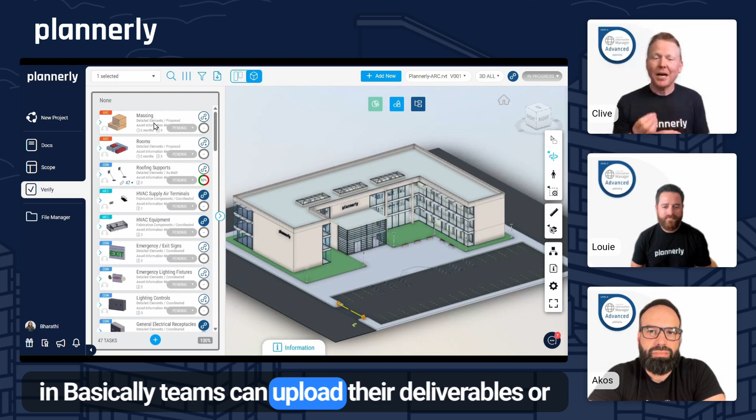This is where integrated tools like Plannerly come in. Basically, teams can upload their deliverables or connect them through another CDE. And whether they're drawings or documents, they can be connected directly to the contracted tasks.

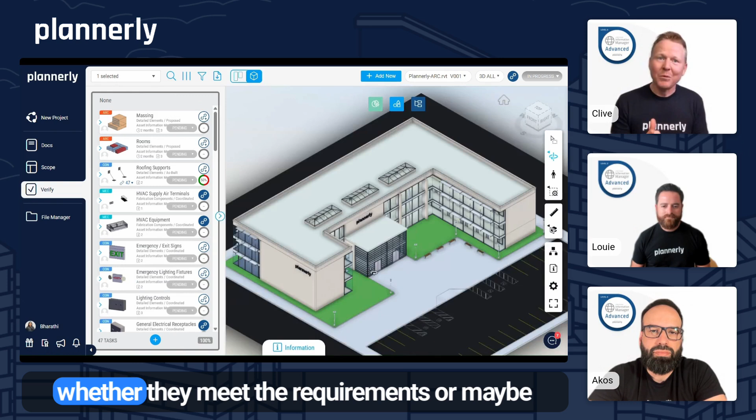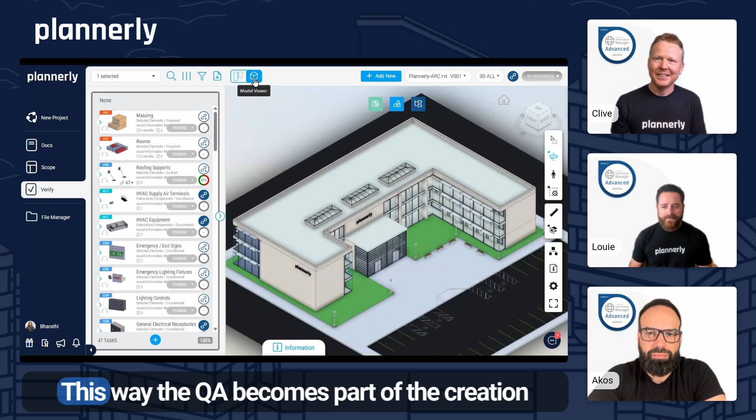And also, automatically, with the verification checks run, they can see live and visually on the models whether they meet the requirements or maybe they don't. This is a really clear way to be able to visualize what has been modeled and met their information requirements, and what still needs to be updated prior to an issue report or a topic in a BCF file being created. This way, the QA becomes part of the creation process.

So not just an after-the-fact wasteful audit and rework cycle. What would it change if the people creating deliverables were also empowered to verify and get them to a state where they simply are 100% accurate to the information requirements that have been set? Wouldn't that make the management of this workflow a lot easier?

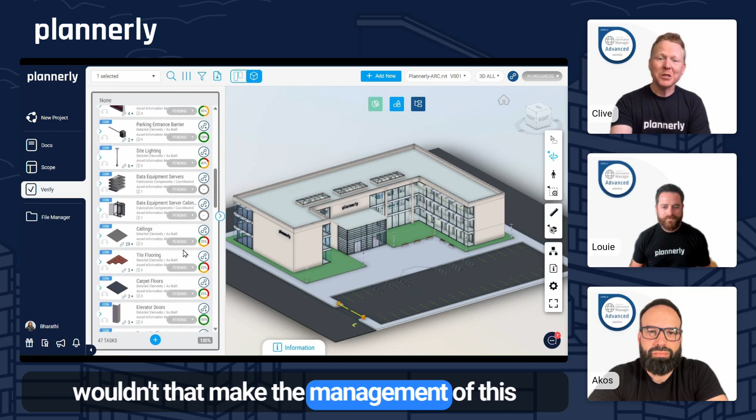If all you had to do was going through and checking the boxes to say, yep, you've done exactly what's been required because it's all shown as green. That would be a better place to be. Yeah, it's a self-QA workflow as well. So verification starts by defining simple, structured rules based on your scope.

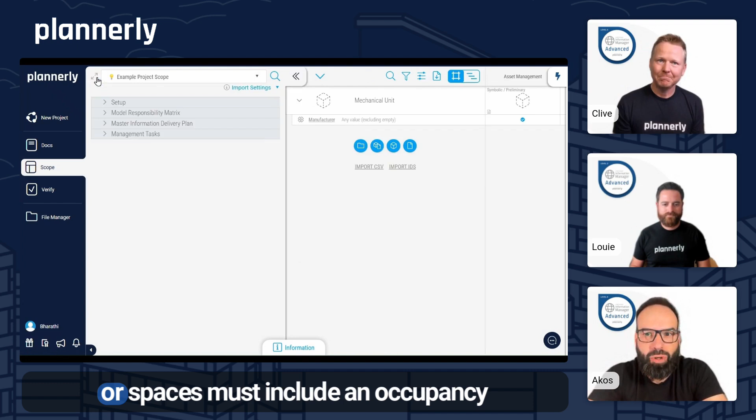So, for example, every wall must have fire rating, or every mechanical unit must have manufacturer property, or spaces must include an occupancy classification. And because these rules are tied directly to the original information requirements, there's no guesswork. Teams know exactly what conditions of satisfaction they need to meet.

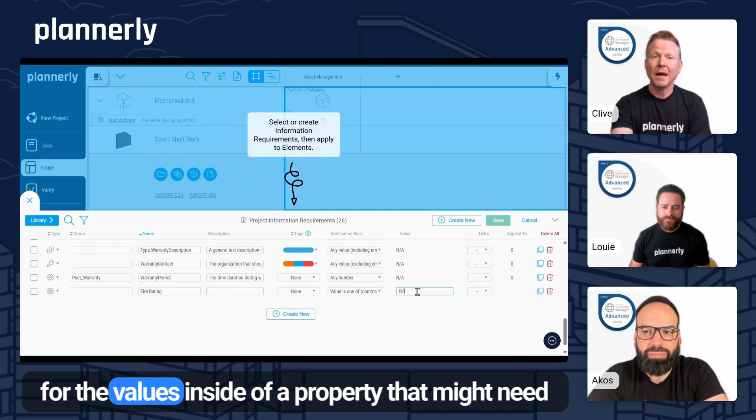Yep. So we can define the properties and the rules and exactly what those requirements are, even using some AI to define a pattern that is required for the values inside of a property that might need to be inside of a group or a property set. Once these have been defined, we can then select them and apply them to the line items in our scope grid. When teams run their own verification, they get immediate visual feedback.

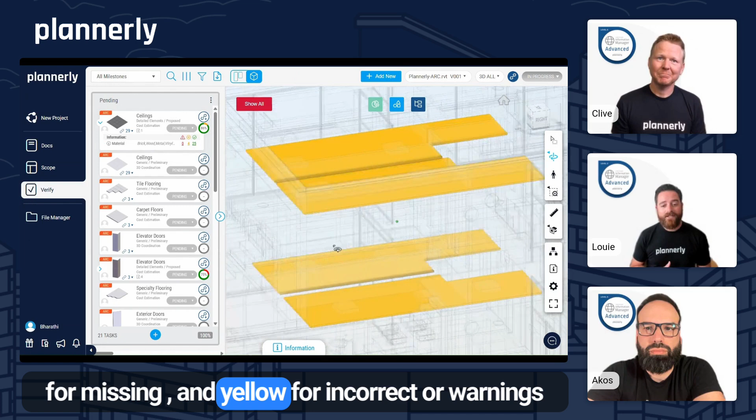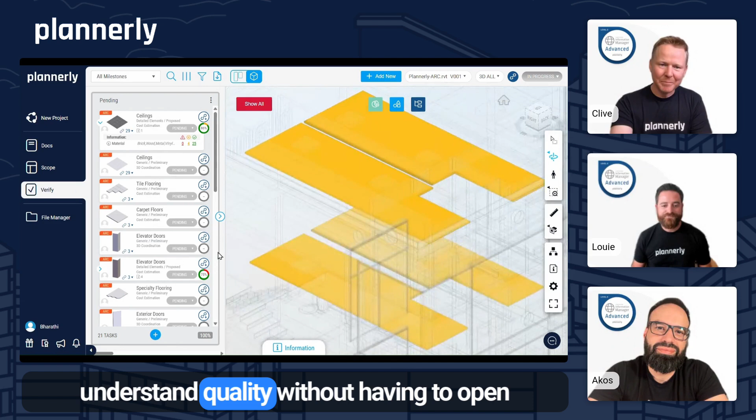Green for passed, red for missing, and yellow for incorrect or warnings. Teams can click on any issue, walls, doors, spaces, and so on, and fix problems proactively before formal submission. No more passing deliverables to a checker and hoping. Teams can own their own quality from the start. Yep, absolutely. All tied in directly to the information requirements that are part of the contract. So you can navigate through models and understand quality without having to open spreadsheets and do any manual checking.

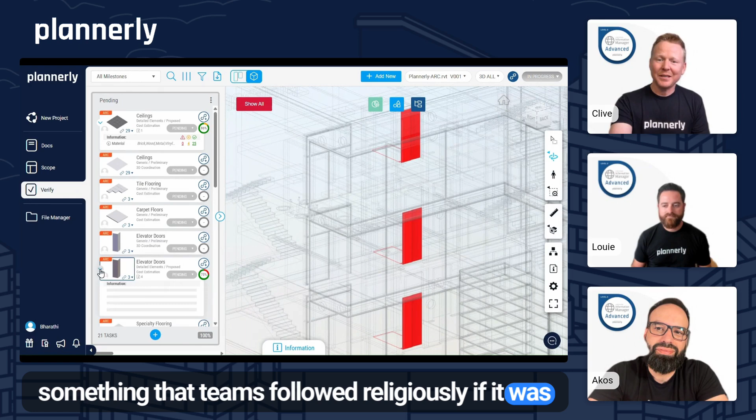How much rework would be eliminated, guys, if this was something that teams followed religiously, if it was caught and fixed by the team delivering the model rather than waiting for somebody to report it in an issue, topic, a BCF file? How much time do you think that would save?

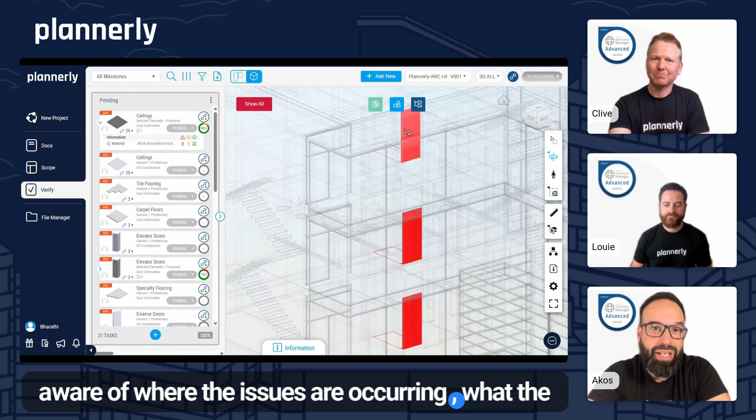The proactive nature is pretty beautiful, I believe. So not having to wait till an issue is caught by the receiving party, but you see that as you are creating the models. Of course, you are very well aware of where the issues are occurring, what the issues are. So fixing them takes no time instead of creating those long reports and sending it back to the source. So I believe it's a no-brainer that it cuts out a lot of wasteful man hours from the entire process.

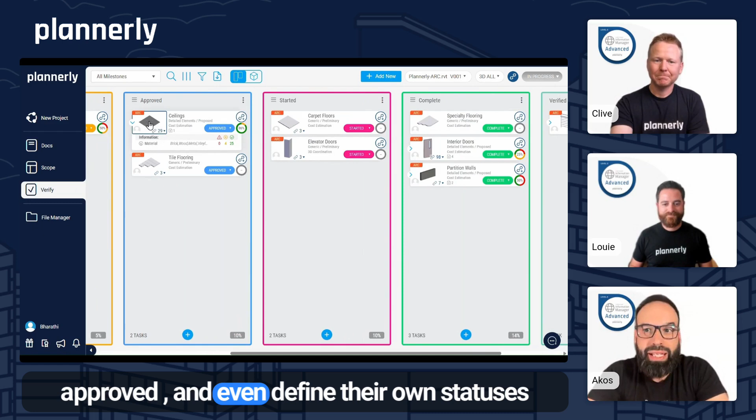Verification isn't just about pass or fail. It's about guiding progress. Teams can update the status of deliverables live in the Kanban board. Proposed, pending, verified, approved, and even define their own statuses. Yep. Real-time quality assurance tracking gives leadership the immediate visibility into what deliverable is ready, which needs maybe some work, and which ones are progressing smoothly and don't need any looking at all.

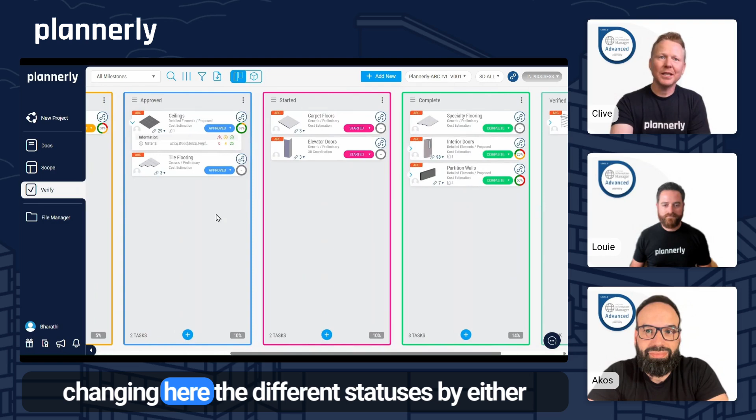Inside of a Kanban board, you can see how we are changing here the different statuses by either clicking on the drop-down or reviewing it, identifying what's done, and then just dragging the cards between the different columns to reflect the updates. It's really pretty simple and fully integrated.

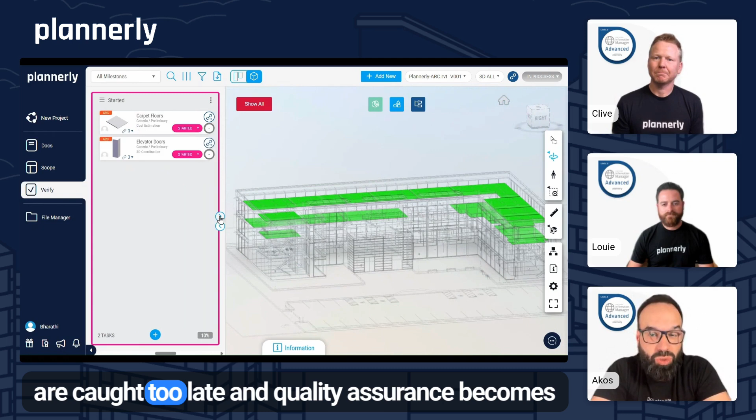Why does this matter, Akos? Why is this important? Well, without structured verification processes, compliance is very much inconsistent. Mistakes are caught too late, and quality assurance becomes reactive and very costly.

Yep. So on the flip side, with structured, integrated, and proactive, we say proactive a lot because it's all about how can you use what's been planned in order to make sure that you don't end up with lots of issues later on. So models will be aligned with the scope and the contractual requirements really early in that workflow. Problems will be caught and fixed before they become blockers and before they're even shared with anyone else. They're fixed internally. And then teams can take ownership of their own quality and build confidence across the project so that other people will actually start using the models that are being delivered.

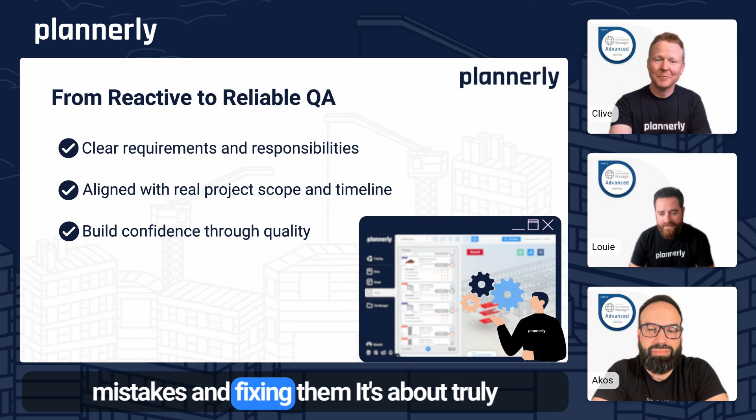Yeah, quality assurance isn't just about finding mistakes and fixing them. It's about truly empowering teams to deliver right the first time.

All right. So ready to wrap up? Let's move on to part 6, which is about exporting reports and managing the final handover. Let's take a look. We'll see you there.